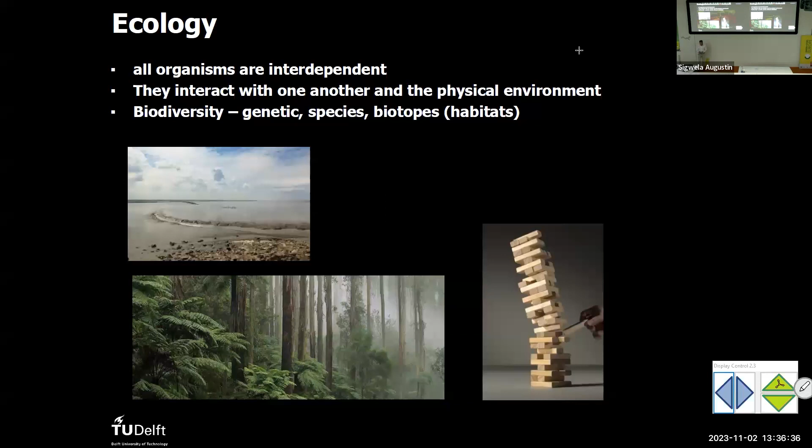Then, urban ecology - why urban ecology? We are here at BK, Bouwkunde, the Faculty of Architecture. It's linked to the whole interaction of organisms with the built structures, but also where people are concentrated.

So what we see here is, for instance, we have a sunflower, a zonnebloem, and then an insect feeds on it, and this insect gets eaten by a bird, but this bird gets eaten by a peregrine falcon. That's basically how urban ecology is explained by a biologist - it's a food web, how things relate to each other.

But from an architect or landscape architect perspective, we had never built this wall, or the architect at that time, for plants to grow on, or for bees to go in, or for birds to nest in. So let's say the bioreceptiveness of this wall has never been designed. So now we can think of that.

And the same with all these buildings, which are put in line in a certain sequence, but never with the idea of being an urban valley - so that nature can also thrive in an environment where people live.

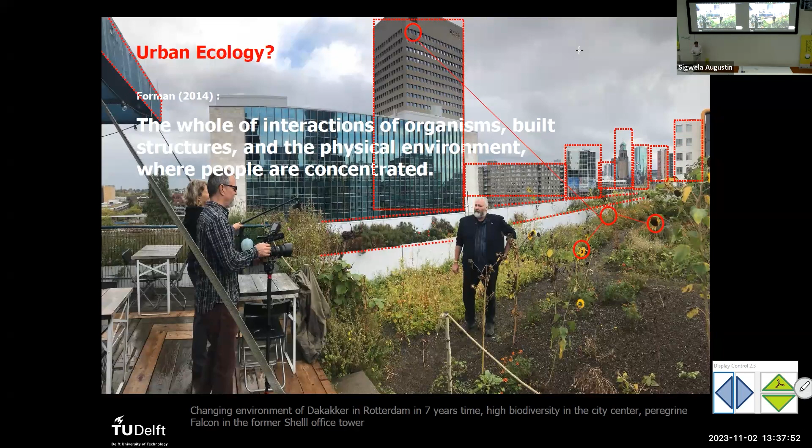And that's basically also what we learned from BirdLife Netherlands - these are basically the four main typologies, or five actually with the buildings, in which they categorized the different bird life: water birds, woodland birds, or birds for buildings. So this is another way of looking at our built environment.

And with students, we also work on the eco-campus with that. So we make cuttings with the students, we do projects, we do historic studies. We look at this from a perspective of how the vegetation in the city emerged, etc. But I will come back to the campus in a moment.

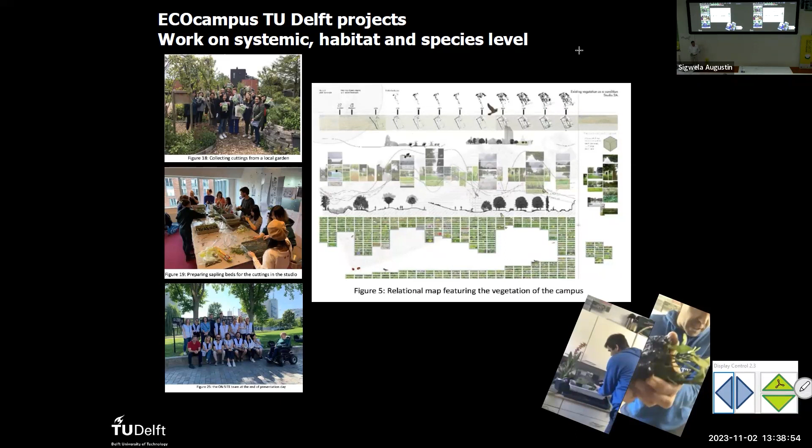Just a bit on how to place urban ecology design at TU Delft. As I said, predominantly this topic has been approached by biologists only, so not by architects or designers. And that's something which currently we are picking up.

There's many offices who deal with this. And it's very important because we think that architectural design and engineering solutions and urban planning explorations can help to see the city as an urban ecosystem, or as an ecosystem in itself, which it is.

And then we look at from brownfield to redevelopments, to green roofs and green walls, to park systems, and how to study that. So how can we translate this notion into specific spatial design and experience? And what are new design principles for that? What are new typologies, green typologies we have never seen before? And that's a quite interesting field.

So of course, when we analyze a city, in this case the city of Rotterdam, we first start with the natural, or in this case also the agricultural layer. So we look at water, soil, elevations in the landscape vegetation, which has this own dynamic and its own character, linked to the abiotic environment which nature thrives on.

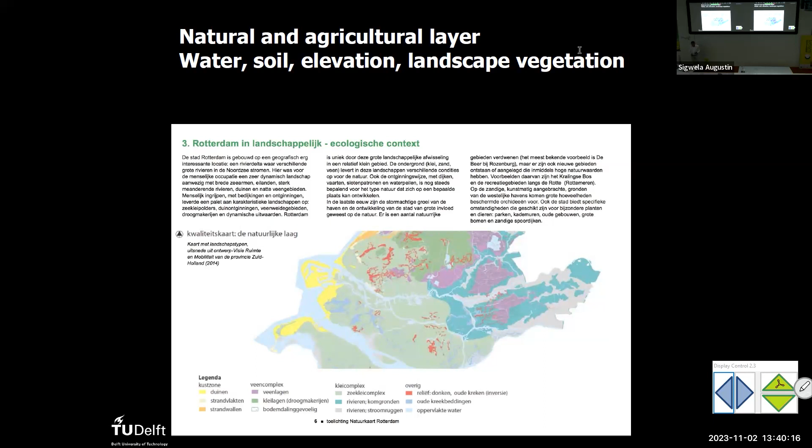But then there's also this urban layer, where each neighborhood has its own different typology. A young neighborhood like the Schoemakerplantage here next to our campus doesn't have full-grown trees. It has nice buildings with solar panels on top, but the trees are very young, while in Wippolder or next to it, the trees are fully grown, etc. So there's a different value there.

And you also see that in the species, but also the urban layout, and there's the size and the patches of the green in those neighborhoods that make these neighborhoods different. So we see the same in the Netherlands - for instance, neighborhoods from the 80s have similar species all over, or pre-war neighborhoods have similar species, etc. And there's also these ambassador species for this. So every city is growing into this and starting to have this.

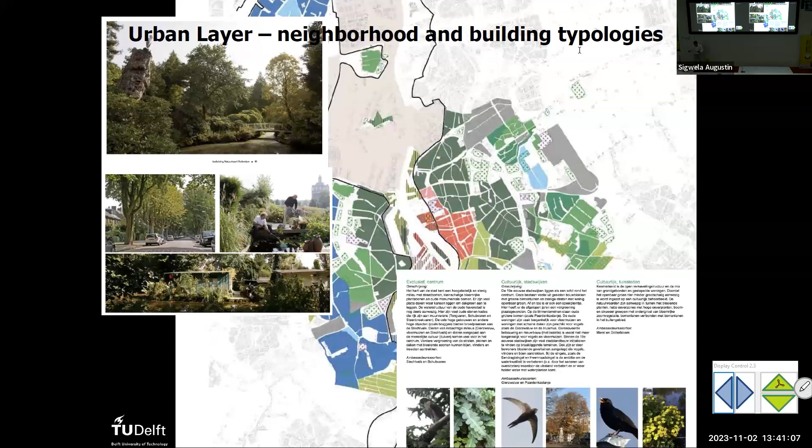So be aware, greening the city is not only for the birds and the bees. It's more than that, and several scientific papers increasingly come also with that conclusion. Because as I started my presentation with biodiversity, it links well to aesthetics, it's beautiful, but also to the urban heat island effect, to well-being, biodiversity, water harvesting, air filtering, recreation.

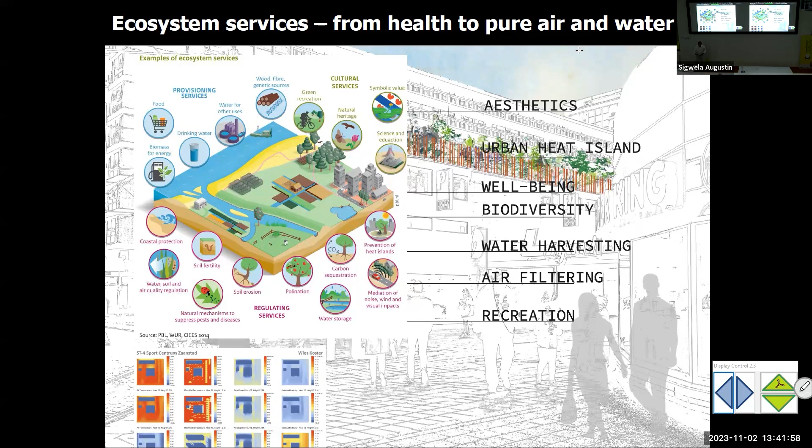Well, there's 24 of those ecosystem services, which can also be linked directly to the Sustainable Development Goals of the United Nations. And so in greening the city, there's much more value than only the intrinsic value of nature, which is very important, or the biodiversity itself.

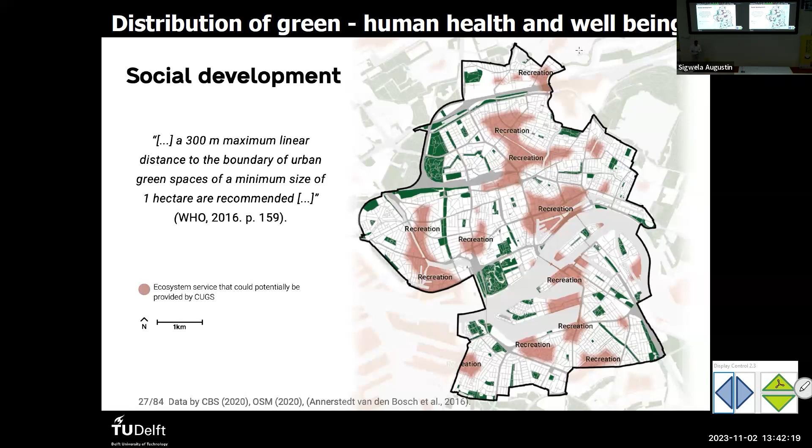So distribution of green and well-being is also very important. Here you see, for instance, the city of Rotterdam, where there is a lack of green in some areas. This is work by one of our graduate students a few years ago. So it's also about distribution of green over the city and how to deal with that, and what type of green

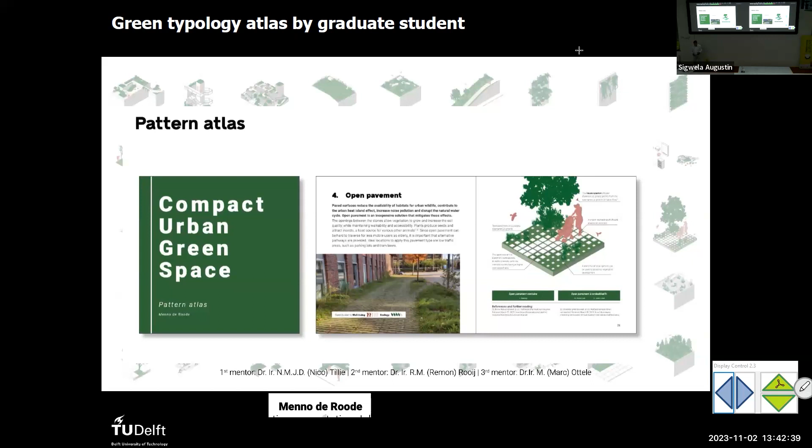we put where. And so Menno de Roode, one of our graduate students, made this green typology atlas and said, okay, what types of green do we have? Of course we have a park and a laan, tree-lined streets and all that kind of thing. But there's more than that.

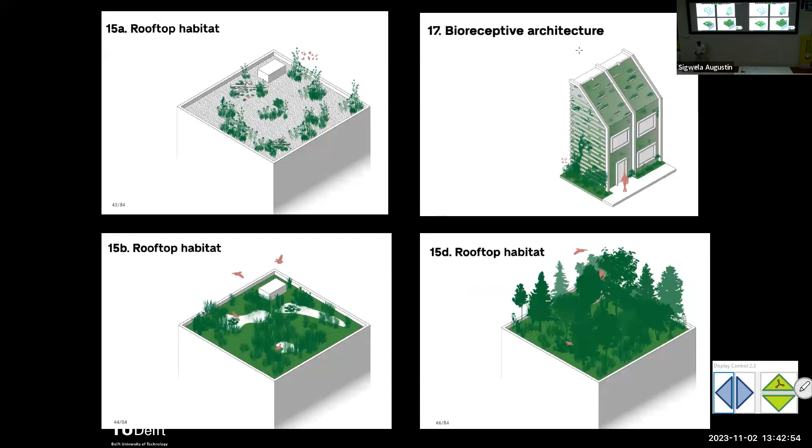These days there's vertical green, different typologies of vertical green. There's different roof habitats, and he did also some tests with that. In this case, in Cuijk by Ebben Tree Nurseries, he said, okay, let's see if we have this soil where we can take some grass from below at the ground level, so that all the worms and all the soil life is also kind of inoculated on this roof. And then he compared which roof grew better.

And it turned out that when you inoculate this roof with existing life, growth would be much better. The downside was that you had a lot of weeds on the roof. So the question is, do you want the weeds on the roof or not? Maybe we could have prevented that.

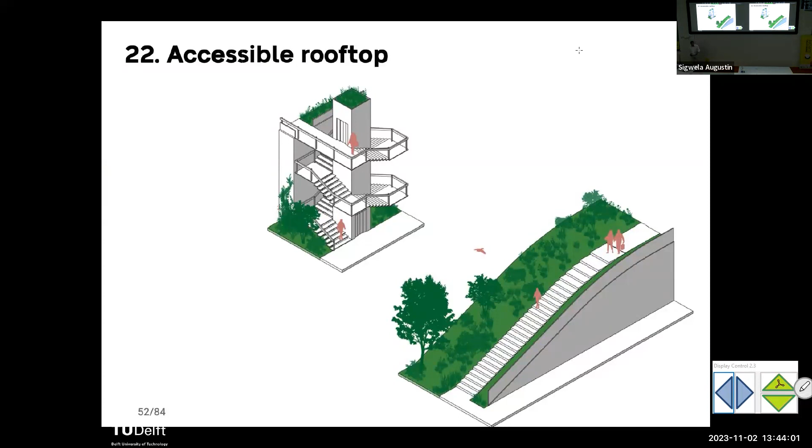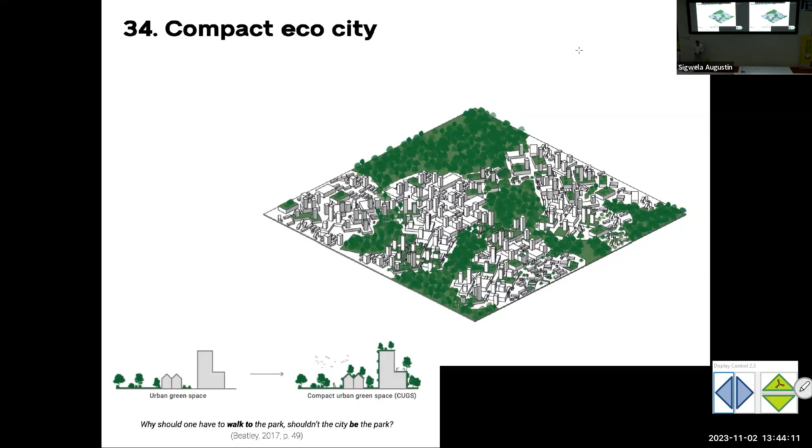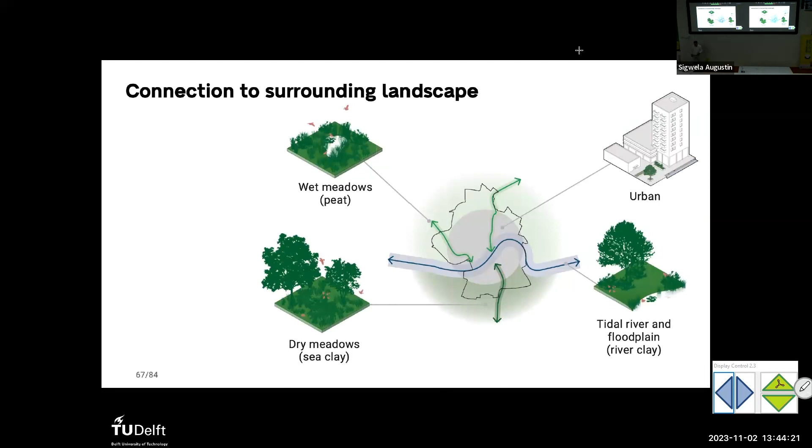But it's also about accessible rooftops. Of course, we have the library here at TU Delft, which is now 25 years old, I think. But it's strange that we never see more of these buildings which actually make you go to +1, +2 in Rotterdam or Amsterdam or other big cities, and that you have this accessibility of this next level landscape, that you kind of have this green structure interweave with the built environment, so that we go towards a compact eco-city, which also links to the different landscapes outside.

So, for instance, to the peat landscape in the north of Rotterdam, or to other landscapes surrounding the city. Other work from students is, for instance, this one from Pu Jiang in 2021, and she looked at the Dordtselaan in Rotterdam, which is a street.

I won't pin me down on it, but I think it's 1 or 2 kilometers long. The thing is that this street goes through peat, through sand and clay. It's narrow, it's wide, it goes a bit up and down, it hits different kinds of neighborhoods, and everywhere in the street is London Plane, platanus, which is great for some bats and some types of birds who breed in it.

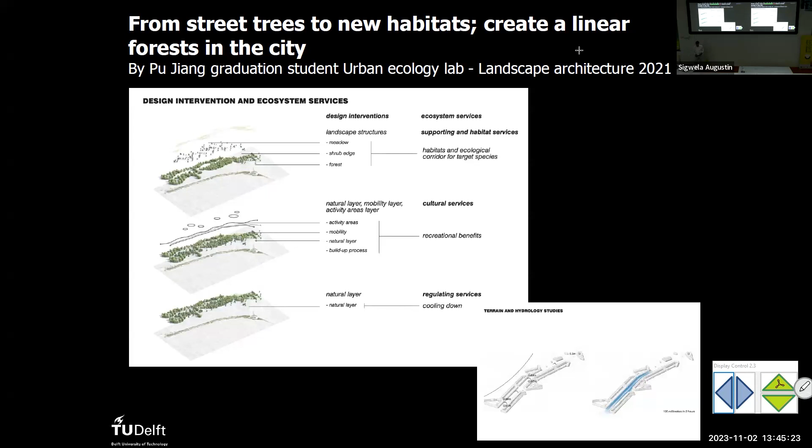But for the rest, the ecological value of platanus is not that big. So she looked at how can we change this street. If there's an opportunity to get rid of the platanus, or if some get knocked down, or the chestnut in one of these streets nearby, what to do? She linked this to ecosystem services, water storage, heat stress, etc., to planting new trees, to go from one species to a linear forest.

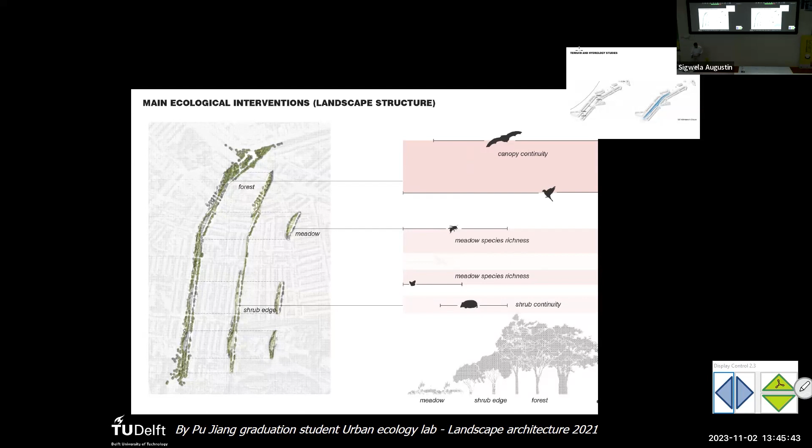So here she did that, for instance, by linking to meadow species. She looked at a bat, a bird, a bee, a butterfly, and a hedgehog, and each of them had their own requirements. So what actually happened is that instead of one species, which is quite vulnerable, we had many species, say 10 species, young trees, old trees, mixed through each other, shrubs, etc.

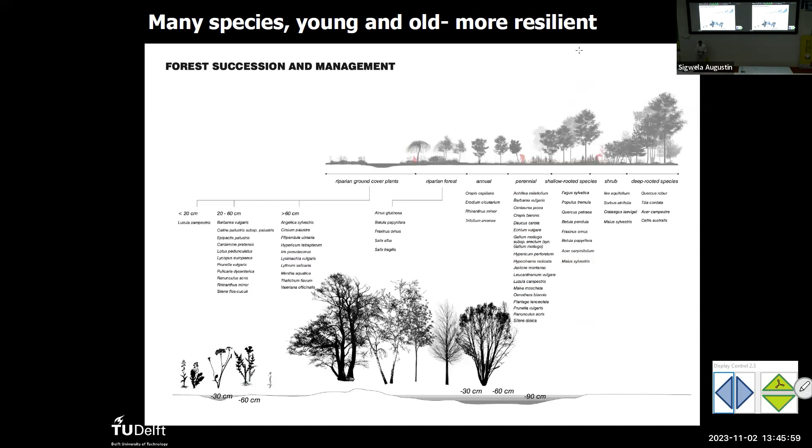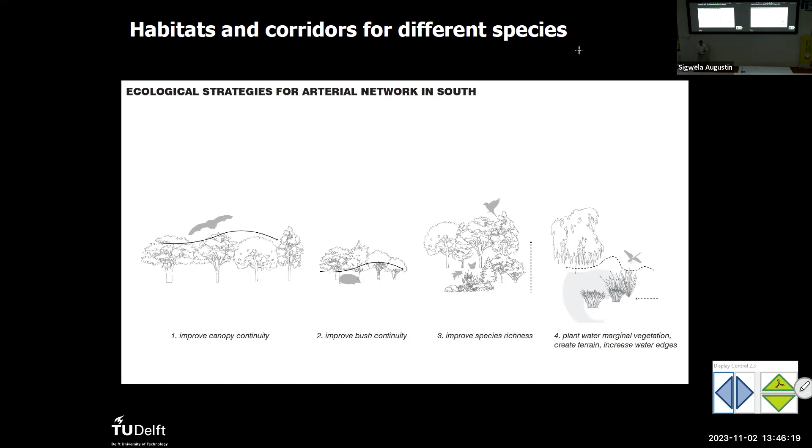And that linked to basically all these different species. For instance, the bats need a continuous canopy layer, but also the hedgehog wants to have some bushes to run around in. So for each species, this was designed for, and here you can see it again in a row with that.

Can this move? Because we don't see it. We're missing some.

Target species, moving behavior of this species, nesting place, shelter, etc., and that then designed that new type of street. So from a simple street, lane and laan, as we call it in Dutch, to a linear forest with this biodiversity, but also with the ecosystem services attached to it.

Oh, no, this is not stuck now.

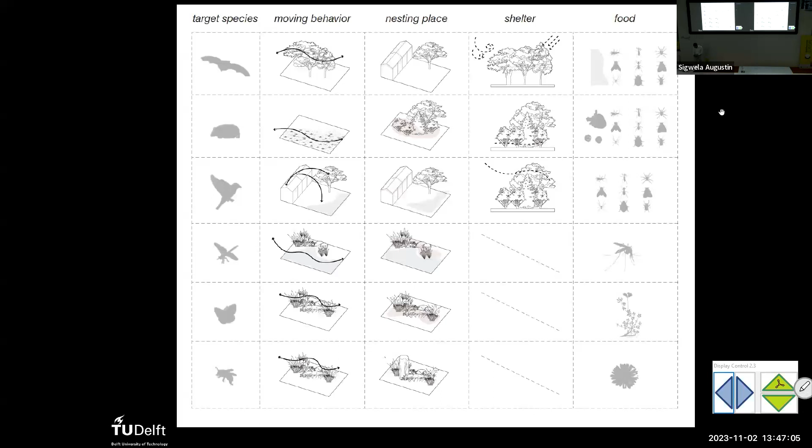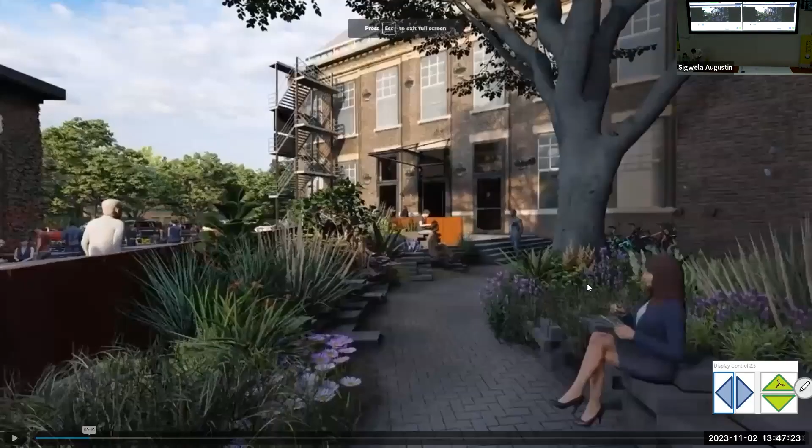So the question is, can we test the stuff we learn from students, the stuff we find out ourselves? Can we test that on campus? Yeah, you can do that one. Yeah, okay, great.

So a few years ago, and I'm not sure if this is the short film or the long one, but it's not that long, don't worry. We made a film with some students on the campus.

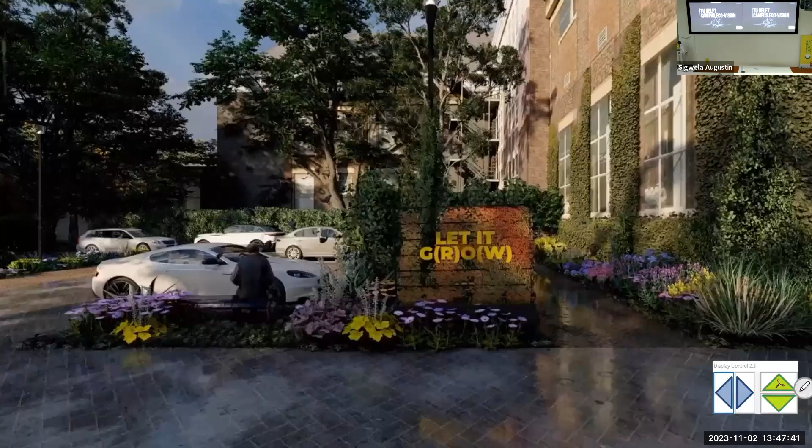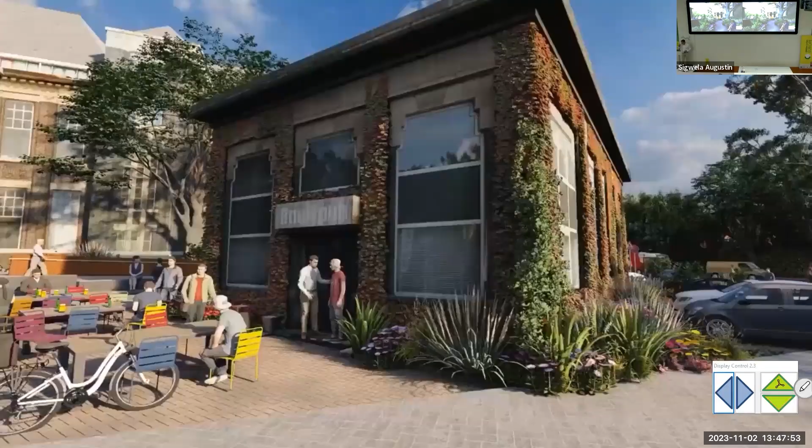Imagine being part of a university campus that is thriving with people and biodiversity. This eco-campus is an essential part of your highest academic and philosophical aspirations. The eco-campus sustains students, faculty, plants and animals living together in an exquisite co-creation of balanced living systems. When you walk through the many biozones of the campus, the flow state and circularity reveals reassuring confidence that comes from being part of natural systems in balance.

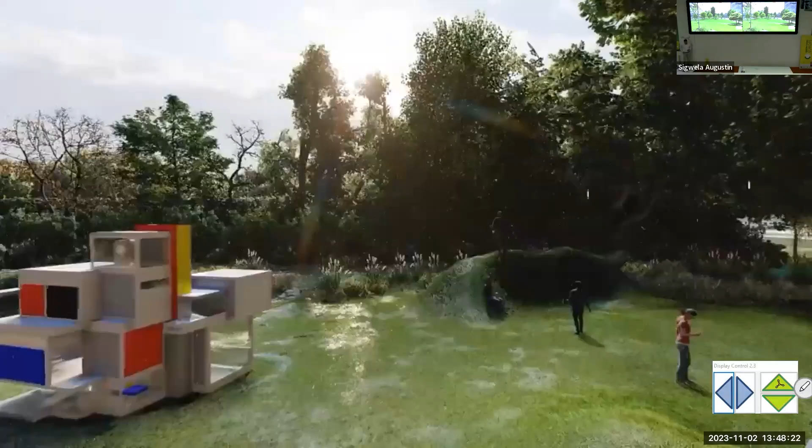Polarizing forces of the past - meticulous, manicured landscapes and human-centered architecture - is transformed into this jaw-dropping campus. This EcoVision campus you're experiencing is what we are planning within the 2020 class of Landscape Architecture, Urban Design and Architecture at Delft University. We're not there yet, so let us show you how we intend to make this transformation.

Delft University started in 1842 as a Royal Academy of Education for Civil Engineers. 22 years later, the academy became the Polytechnic School of Delft. Today, the Delft University of Technology, also known as TU Delft, is a prestigious international polytechnic university with 8 faculties offering 16 bachelor's and more than 30 master's programs. More than 25,000 students and 6,000 employees share a fascination for science, design and technology, focusing on a joint mission: impact for a better society.

Our approach for this EcoVision campus project borrows from the Dutch tradition of working in a multidisciplinary way. Together, our class is an international mix of students working in groups to create integrated solutions for the built environment. Our class formed new groups for this final planning. Each group focused on a different element of the eco-campus design.

The art of letting grow is not a fixed result. It is a dynamic process. It is about living and growing with nature, so it's not only human-oriented design. The concept is to work with the living systems and go with the flow. We propose working in a bottom-up way, where we design with time and develop a campus with what is already there, what already exists.

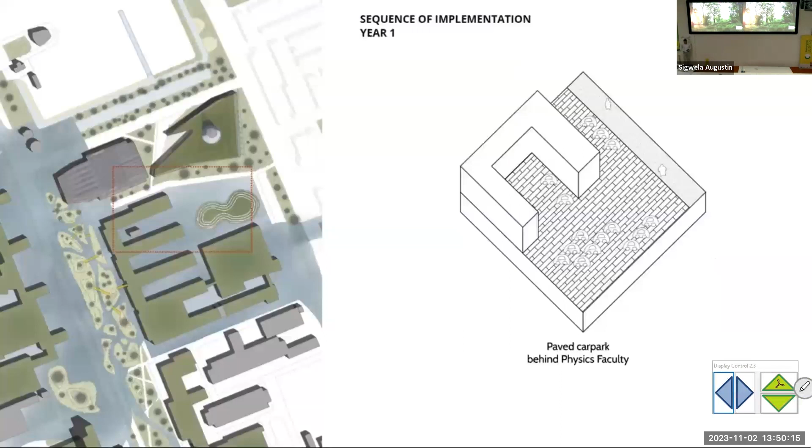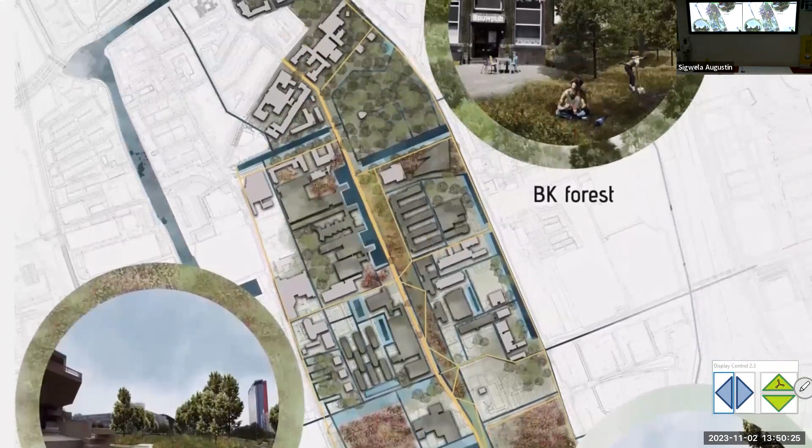We're working on reducing pavement, adding compost layers, and enabling vegetation to go through different phases of succession over time. Letting these elements go will reduce the costs of campus maintenance and improve the overall health of our community. In combination, our ideas communicate a new campus vision that makes room for diversity and growth within the human and biological communities interacting and evolving. We hope to see you soon at our Eco Campus.

Escape? Oh, okay, yeah, so this was a short version, which is good.

Basically, this is the outcome of the Eco Campus project. It's an elective course we do every year with students on campus, where they really also can build stuff, like planting schemes, types of gardens, green walls, green roofs, etc.

The nice thing is that from this vision, the students, or we made with the students, looked at, for instance, the water system, the higher grounds in Delft, and this is our campus, which waters basically to this side. We said, okay, let's make a vision which actually reflects this. So that's why this was kind of forestry, meadow, and this swamp area. Of course, there can be trees in a swamp area as well, but this was the choice we made.

This also led to a kind of vision which campus and real estate, but also the board of the university, kind of acknowledges - okay, this is a kind of ecological mapping we like to use and decide upon when we have new projects on campus. So this is the official ecological campus layout for decision making, and it's also linked to target species which we can now focus on. So every time we have a project, we can relate to that, or basically they have to relate to this. So that's a very interesting, nice step.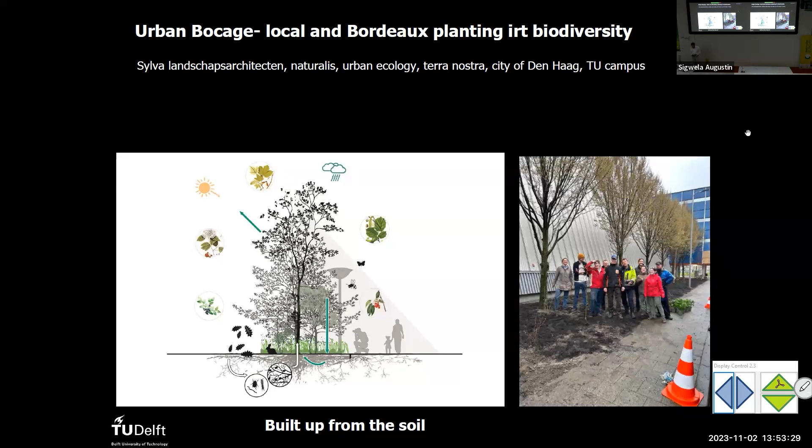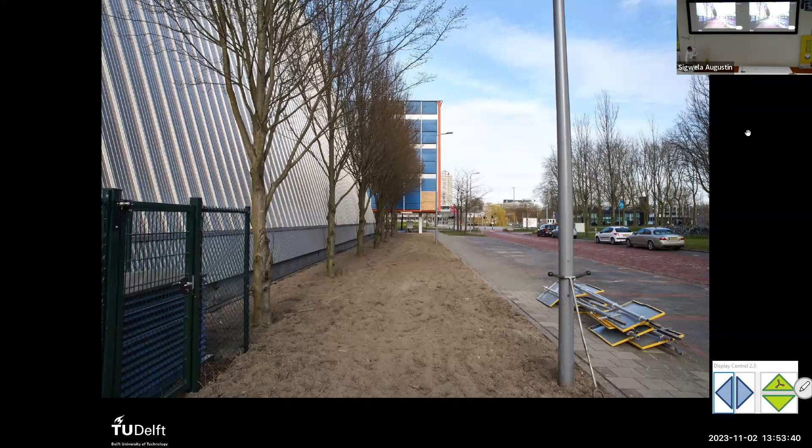What we actually did, and Rosa is one of the planting people here, we turned this bare strip, which was full with - what was it, weeds or grass, I can't remember - into this, which is basically should be a kind of hedgerow full with native plants.

So let's say native plants from the environment, but also native plants from France, so from Bordeaux. And then you think, why Bordeaux? Well, so we have one edge, one side, which is full with plants from the Netherlands, and the other is from Bordeaux, because we expect the Bordeaux climate in the coming decades to be here. So we would like already to test with these types of plants.

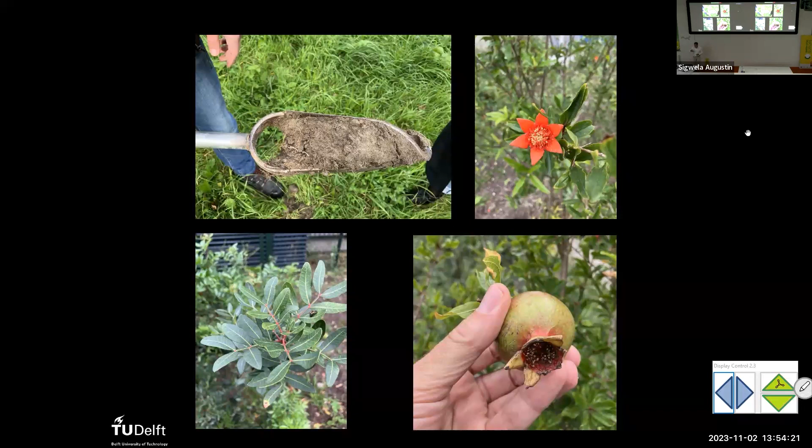So this is a punica, a granaatappel, and this is not pistache, I think it's pistachio. And we also do soil measurements - how does the soil change over time? What is happening over there?

Other interventions, basically talking about new typologies, is that we also did a project for bees, so a bee landscape. In the beginning, we said, yeah, bee landscape, bee hotels, bee burrows, that's die bijenheuvels. And we thought, well, is that really landscape architecture or design, or a landscape architectural typology? No, not yet. But we said, what if we turn these little hills, not into little hills, but we turn them into a ridge, so that we have ongoing ridges where we can have bees inside, where we take out the soil for a wadi to construct a bee ridge.

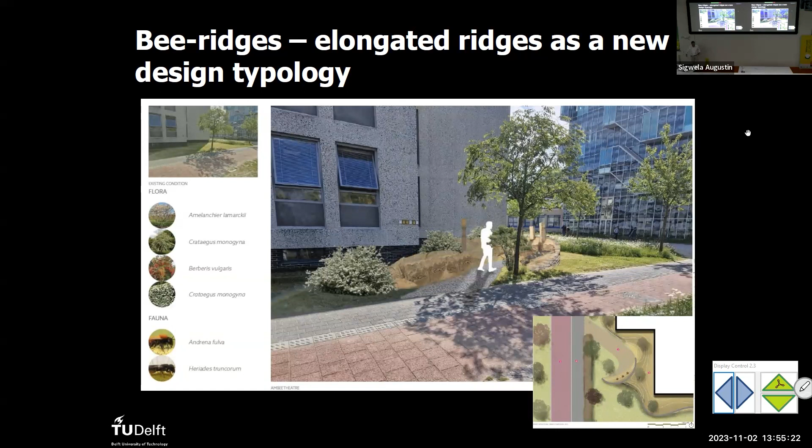And if it's above water, maybe we can use it also for kingfishers or oeverzwaluwen - forgot the English name for that, swallow, I think. So basically, to become more creative with the edges in our public space, and to come up with new design typologies.

There's a project from René van der Velde, so probably he will show that next week as well. This is the climate arboretum, which will be these trees - they should go somewhere. So with a small group, René, Rosa, and René Hoonhout, we came up with this plan of making a climate grove.

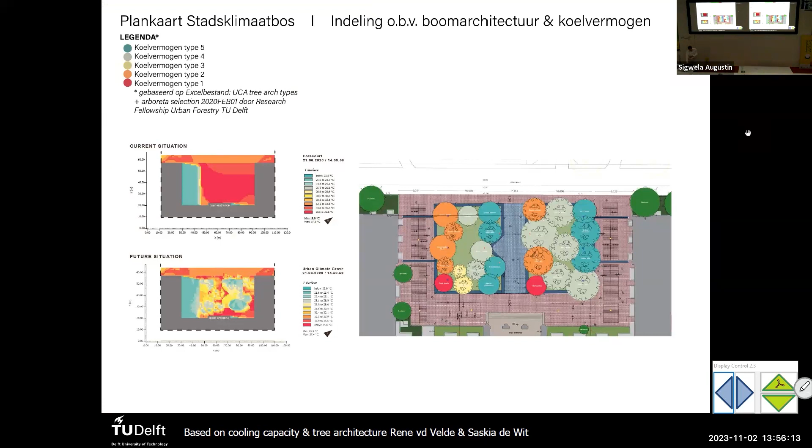Basically, instead of only using it for heat stress, also have the water from the roofs concentrated here so that it can actually infiltrate. So it's an urban climate grove, or treewadi in the volksmond, based on research from René van der Velde and others, and Saskia de Wit, looking at the cooling capacity linked to heat stress.

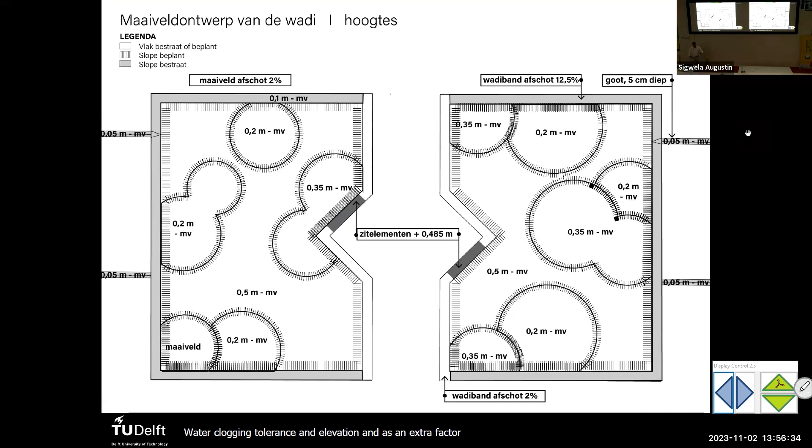But also, if we want to have this water in this area, we should be able to plant trees which can resist water clogging. If the water stays for a long time there, we have deeper areas or higher areas, so we designed it in such a way that the trees can actually be on a dry part or a wet part. So this is also testing.

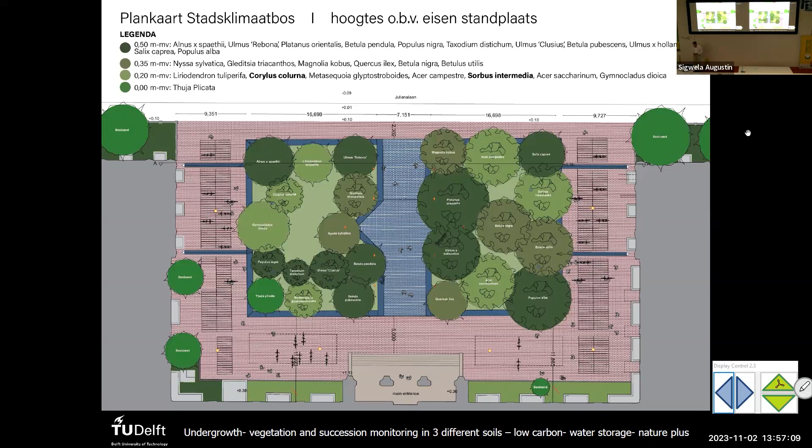We don't know everything, but if you look outside and walk along a river, you see that there are certain tree species who can deal with this and others cannot. But there's a lot more research to be done on this - for instance, different vegetation, different soils, also where we do not plant plants, so basically to follow succession from a bare piece of land and what happens with natural succession, and more research on that topic.

So just some extra notions, because this is supposed to be an introductory speech and not a half an hour lecture. But anyway, some extra notions on this.

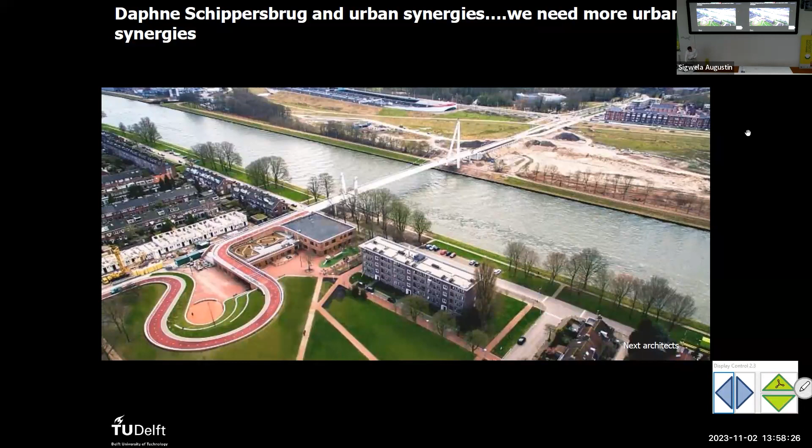This thinking in synergies seems logical and we say we do it, but every time we build a building or build a park, we never link these things. We do have these Roman villas for a long time, we have suburbia, high rise, but the question is: is this the answer to the challenges we are facing? To some, yes, but you introduce new problems - social problems or mobility problems, etc. So there's definitely some good in this, but the question is, are these the answers?

Well, no - but then also the question is, are these fairy tales, sprookjes? This is what Hundertwasser did 100 years ago. This might be a joke, but still, you can see where this is going.

If you look at this school in Paris, actually in Boulogne-Billancourt, they have these wadis with trees in it, and they have this bioreceptive concrete where the plants grow in, where the bees can go in, where the birds can go in. They have green roofs - this is the local gymnasium over there. So it is possible to build like this, and to take this a step further.

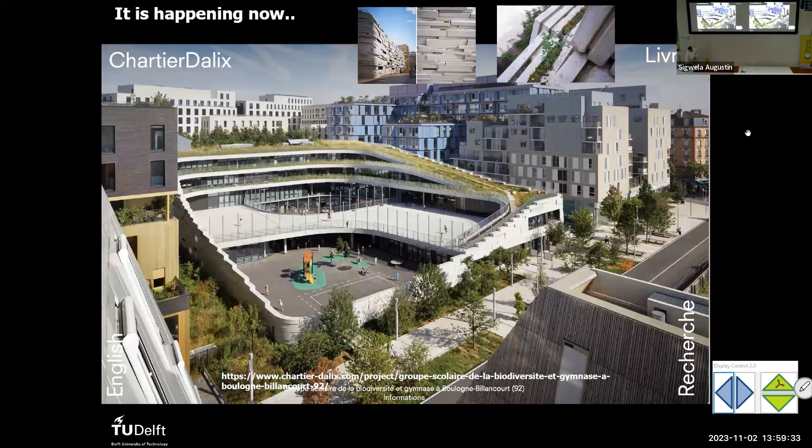What is interesting as well is how we can design cities based on ecosystems and improve the total urban system, so synergies throughout society, throughout all scales. One of the things is, for instance, that it should be nature positive, zero carbon, or even carbon negative, and climate adaptive.

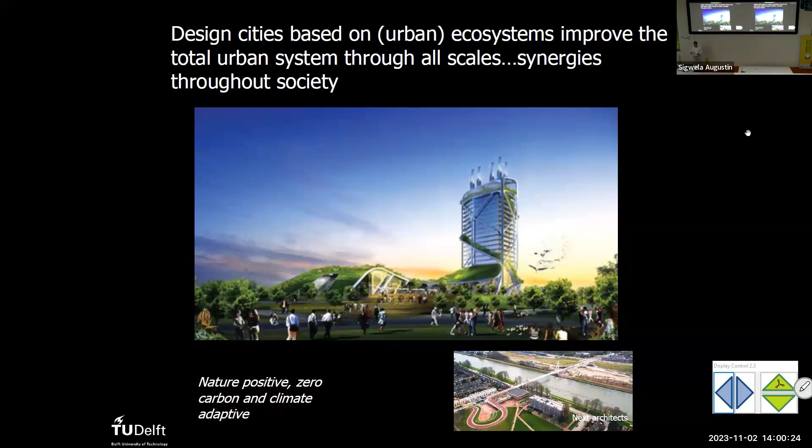With this in mind, we also selected the speakers of today, where Mimu will talk about the building industry and the buildings from Helsinki and Finland, Greg will do rewilding Manhattan, more that perspective, and Matthijs Hollanders will talk about what we design and build already outside from the perspective of the urbanist.